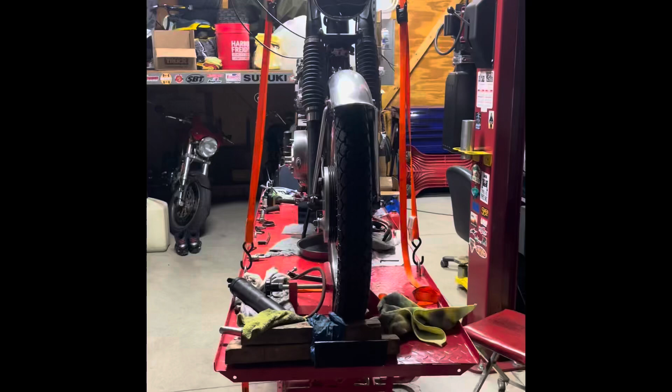All right, back out here on the old BSA. Let's get these valves adjusted.

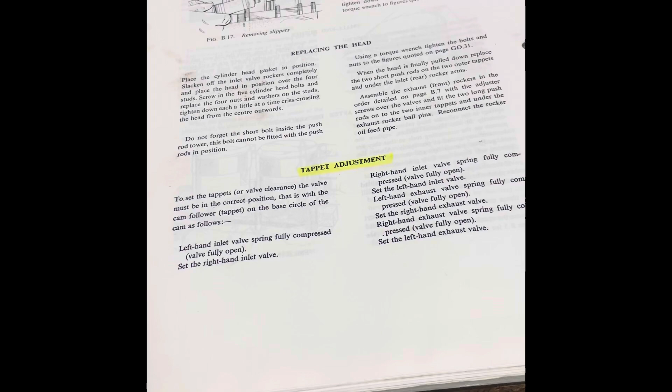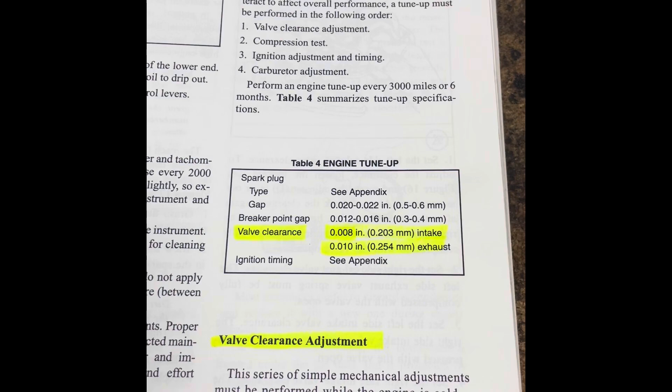Tappet adjustment in the old book's under the engine section. I'm pretty sure it's under lubrication in the new book. Last I seen it, I think it's under lubrication. Yep, here it is, it's in lubrication and maintenance, not in the engine section. So there's some differences between the two books, but the clearances are the same.

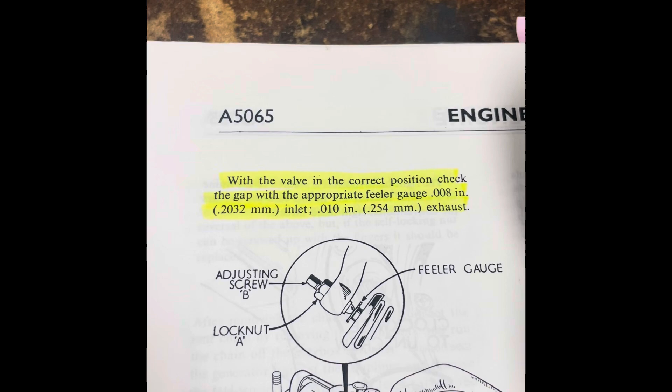8 thousandths on the inlet, 10 thousandths on the exhaust.

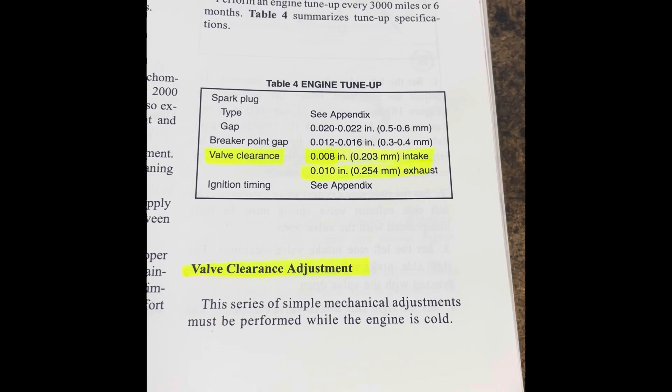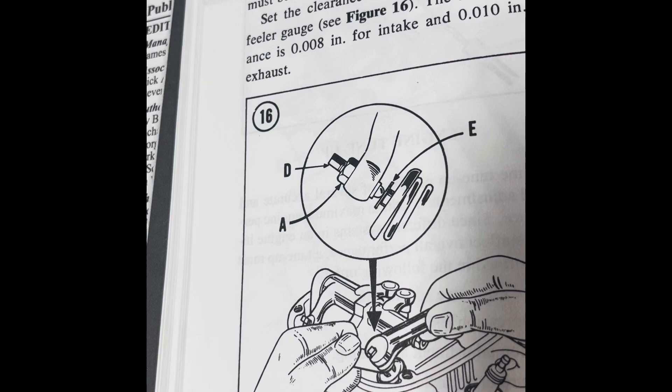All right, the order is a little different on which valves to start with between the books, but this book does talk about the engine being cold - no mention of that in the other one. It also calls it tappet adjustment, here it's valve clearance. You got your adjuster D, you got your lock nut A, and we're going to do the left side exhaust valve first, which will have the right side exhaust valve fully open.

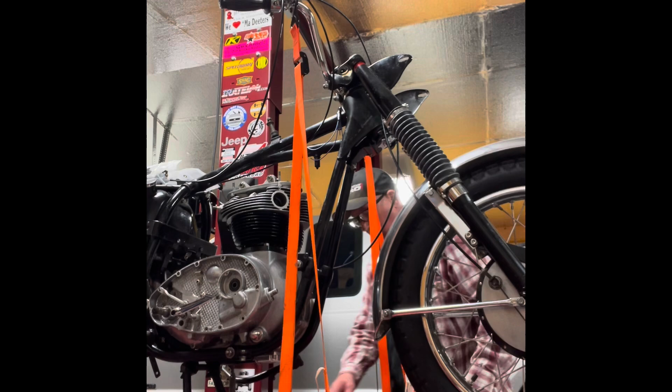So sliding the feeler gauge in here. Of course, my jam nut needs to be backed off. If your tools are clean, definitely don't want to drop anything in here. Got a 1/4 inch open end.

I was working on the other ones, and a 3/16 British wrench. Might get needle nose - oh, there we go, works there. That's backed off quite a bit. Gonna run it in there, it's tight on the feeler gauge.

Probably easier to see me do the other one. All right, place that lock nut a little bit, basically turning it down, get a little bit of resistance, a little bit of drag. Kind of check it a few times.

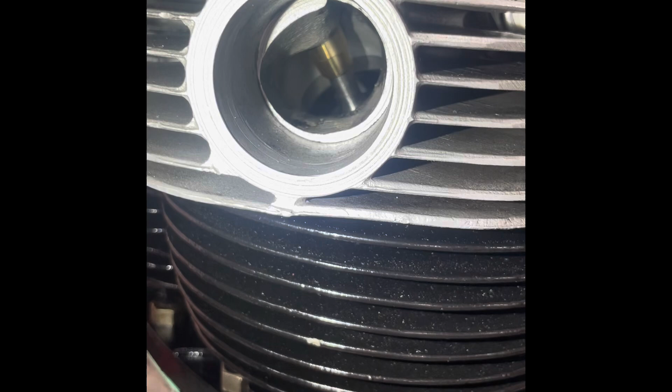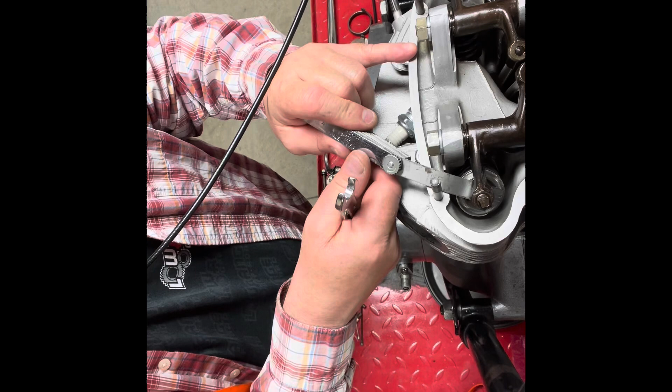All right, left side exhaust valve is now fully open. Let's get set up in a spot here for adjusting this one. All right, I got a 10 thousandths feeler gauge in there, got a little bit of drag there, so I'll lock it down.

Let's just do a little bit. I'd rather be on the loose side than the tight side, but let's see here, let's do a little bit. Yeah, just a skosh there. Oops, going the wrong way. Okay, yeah, I like that.

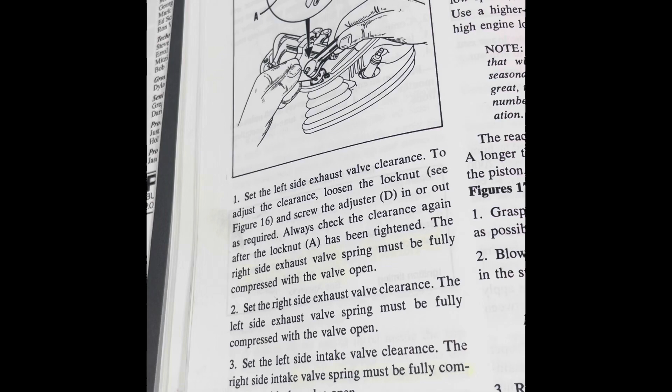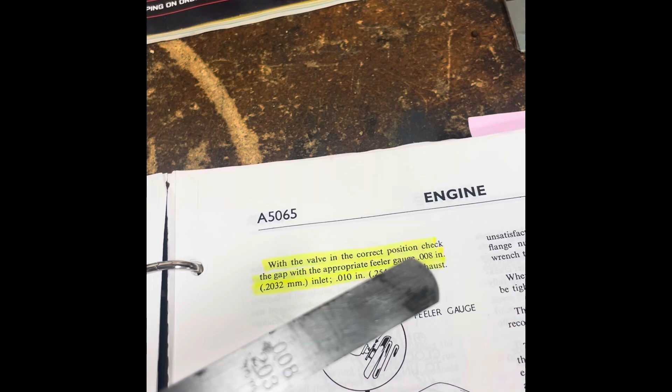All right, gonna move on to the intake. So we got the left intake valve clearance, the right side valve spring must be fully compressed, the valve open. Might be kind of hard to see, but right side valve springs are fully compressed. Let's move over to the left side. Again, the exhaust is 10 thou, intake is 8 thousandths.

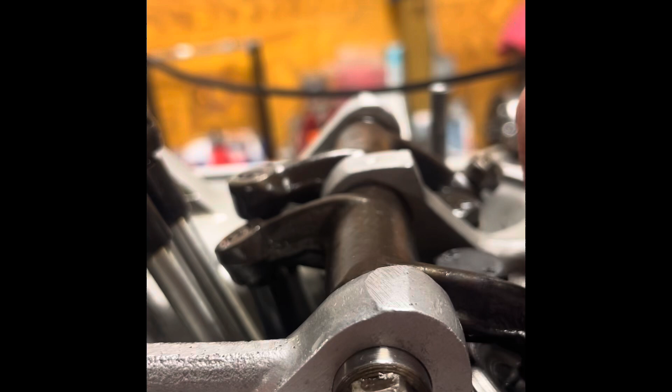All right, spared you the adjusting part, but kind of listen, you can hear it. Probably see it in there, you know - it's 8 thou right there.

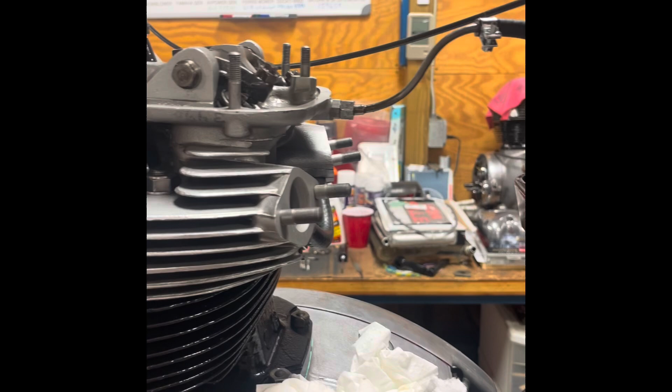All right, on the right side intake. As I'm spinning the back wheel, I'm just keeping an eye on the rocker arms and stuff, and you'll see when there's no action happening. Like I compressed the left intake valve all the way down, it's open right now, and now we'll adjust the right side.

All right, got this one set up. You know, a little bit of drag on there, not a lot, just a little. So you can stick it back in there, pull it back out.

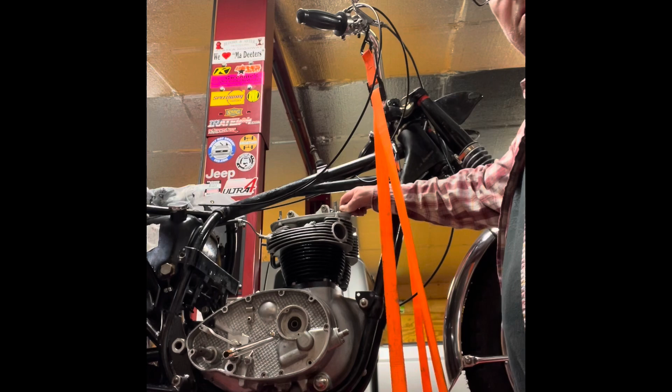All right, what I'm doing here is rolling the wheel through after I've done giving that a check, watching the rocker arms. Okay, it's not moving no more. Over to feel that one. Kind of just rolling the wheel through, going through, and double checking them, seeing how they feel.

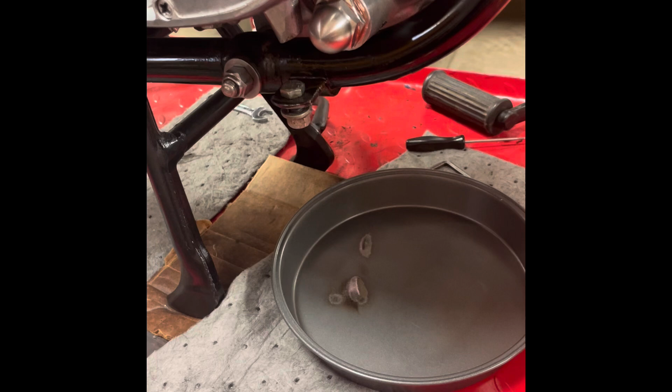All right, before lunch here real quick, my rocker cover hardware - put a little grease on the gasket here, gonna stick that on, the rocker cover on, no reason to leave it off. Looks like the oil leak I was having there at the sump seems to be good, nothing coming out of that pressure relief valve either.

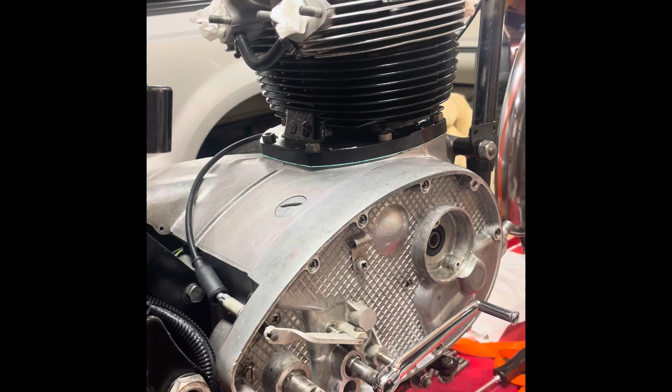Yeah, it's easier dumping oil in there through the push rod tunnel than the timing plug. If I was in the timing plug, I guess I'd have to deal with it once the oil's changed or whatnot - first few oil changes will be pretty soon once it's up and running. But yeah, I was thinking the carbs, but I'm thinking get the headlight bucket instead and the wire harness and start laying that out before putting the carbs on.

Still waiting on clutch parts, but got that valve cover on there before lunch here. All right, starting to look like something here, huh? Well, I'll order up a pizza.